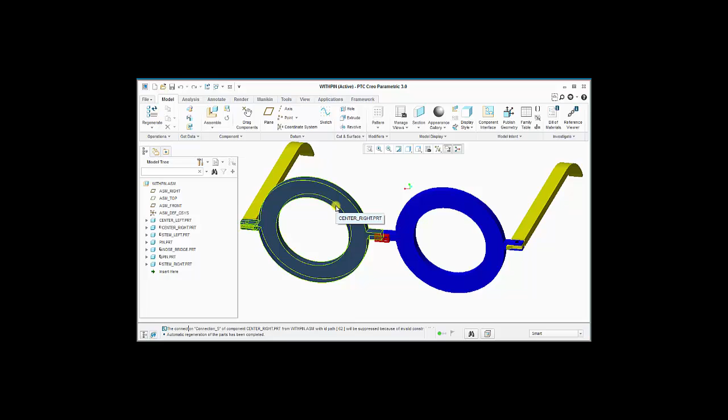The first method is a suppression technique. We learned that the connection of this component, which is center right, is the one that's problematic. So what you can do is suppress everything after that component. And it's a good idea to double check and make sure this component drags okay in this state. So go ahead and try to drag it. It moves okay. I'm going to middle click to restore the part to its original location, and we'll just close the dialog.

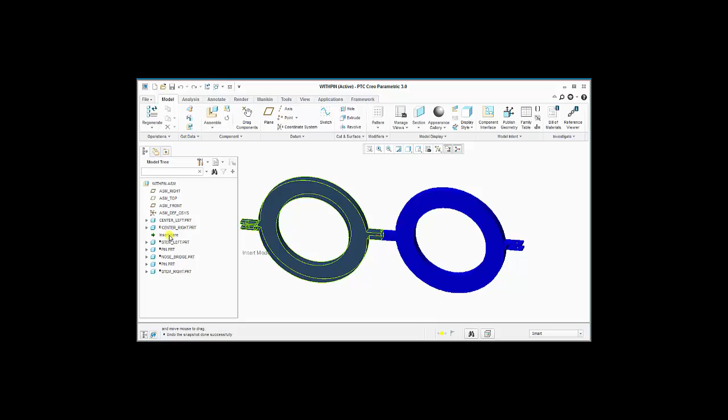Now what we can do is resume half of the remaining components that we suppressed. There's 5, so we'll go with a number such as 2, and we'll see if we can drag. You could try to enter mechanism too, but this looks like it's working okay. So again, I'll middle click and just close this out.

And we get 3 remaining components, so I'll just take a wild guess and go 1 more. And we'll try to drag this component. It's not moving. So I see down the bottom, we get that same message that the connection's suppressed, and you may not drag a model belonging to the ground body. So we'll close this out.

Now what we're going to do is look at the second technique, and it utilizes some of the tools within Creo Parametric. And we know that, again, this is the component whose connection has a problem. So we can select on that component and either right click to access the reference viewer under the info menu, or go into the dashboard. So we'll take a look at the children. I'm going to slide this off to the side here so you can see some of the children parts.

We have a nose bridge part in the middle, highlighting in green now, this pin part over on the left, and the stem. So one of these 3 children is causing an issue. I'll close the reference viewer, and we can just suppress those 3 children. So I'll pick one here and hold shift and pick the bottom one, and right click and suppress. If you have items that are mixed through the model tree, you can hold down control while selecting those.

So now this should drag okay, and it does. So you can then begin resuming components one by one to see when the problem returns to the model. So I'll go ahead and resume this one and try to drag again, and there it is. So the nose bridge is the problematic part, as we identified using the suppression technique previously.

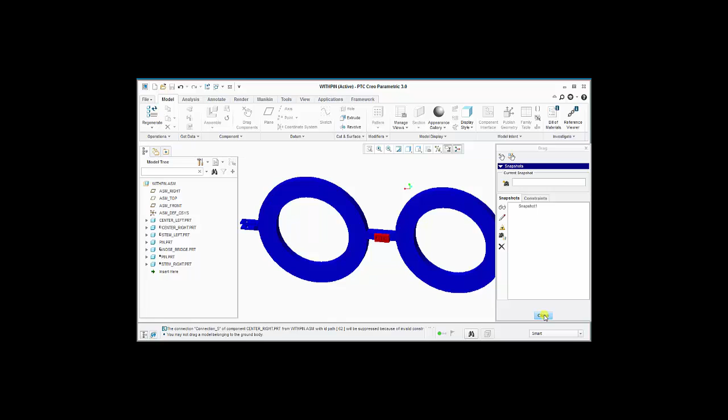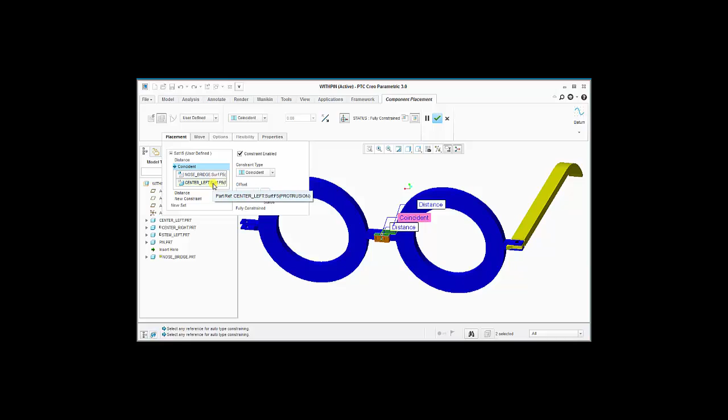The next step is to query what's in the constraints of this part that is causing the issue. So go ahead and perform an edit definition on it, and check the placement constraints in the dashboard. So the first component here is a distance constraint, and we'll notice it's between the nose bridge and the center right part. So this next coincident constraint is between the nose bridge and the center left part. And then we'll check the last one in here, and we'll notice that also has a center left reference.

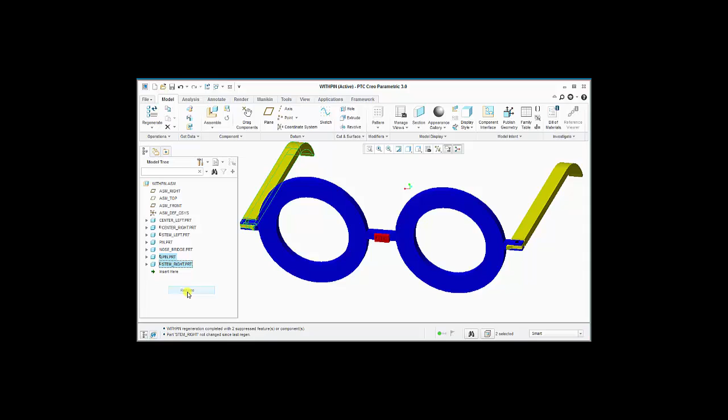So what we want to do is ensure that all references belong to a single component. So the easiest way to fix this is to address this one. So we'll remove the right side constraint and replace it with something on the left side, and finish. Now we should be able to resume these last 2 items, regenerate, and enter mechanism successfully.